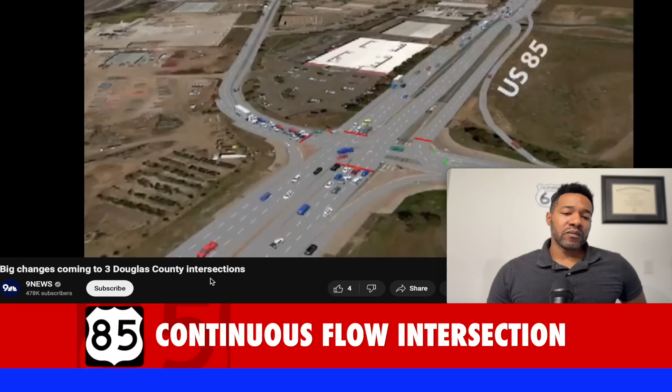Drivers are literally going to be scratching their heads thinking, what is going on along Highway 85? So what's going to be happening here? It's called a continuous flow intersection, better known as CFI. So I want you guys to take a look at your screen, especially if you're in Douglas County and take Highway 85. So here's an example of what you're going to experience in this area. This new flow removes the conflict between oncoming traffic and drivers turning left.

So yep, just like she said, this is yet another take on that, removing that conflict between left turning traffic and through traffic through these intersections.

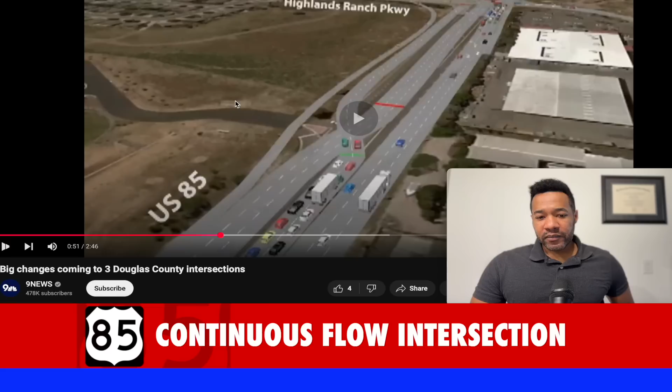Drivers turning left at the new intersection will cross through traffic using a new signal. So you're going to continue to that far left side of the road and then make a left turn, while the other drivers, they're going to just keep driving as they normally would at any typical intersection. So these intersections along Highway 85, they're going to be opening up in phases. Starting on Wednesday, phase 1 will open up southbound Highway 85 to eastbound Highlands Ranch Parkway traffic. Then March 26th, that's going to be phase 2 that is scheduled to open for southbound Highway 85 to eastbound Town Center Drive, and then you have C470 that it's going to open up sometime in April. And this full project includes several other elements that's going to be completed later this year. We have a very good track.

All right, so this area in question, we can go over here to our Google map, go take a look at the Colorado area. It's here south of Denver. So if you look at it, you see Interstate 25 is the primary north-south interstate. The road in question here is US 85, which is the surface road alternative to Interstate 25. So you see Highlands Ranch down here. Basically, this is all suburbia out here.

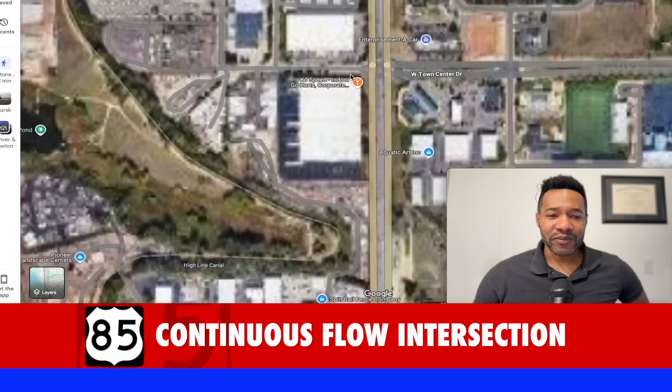So they're talking about this area in here, putting these intersections. And if you look at the satellite view, you can see right now it's just a 4-lane divided intersection, probably lots and lots of traffic out here. But yep, this is our corridor right here, US 85. Let's go back to the video.

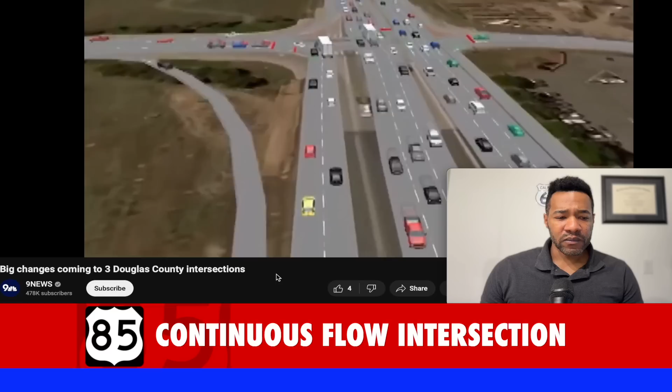Record safety wise, they actually perform better, 10 to 15% better in terms of reducing crashes. So it actually functions quite well. And that results in a much more efficient and safe and cost-effective solution for intersection problems. So Corey, Jordan, this is all part of that widening project along Highway 85 here in Douglas County. This project actually started back in 2022. It's not going to be completed until later this year.

Okay, so let's take a little more in-depth look at this continuous flow. I'm going to give you guys my thoughts on that intersection. I keep saying interchange.

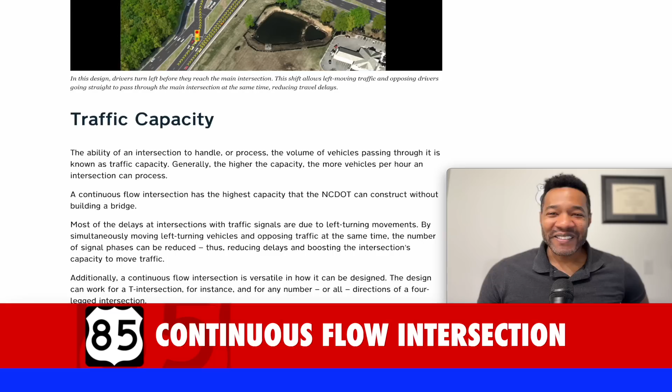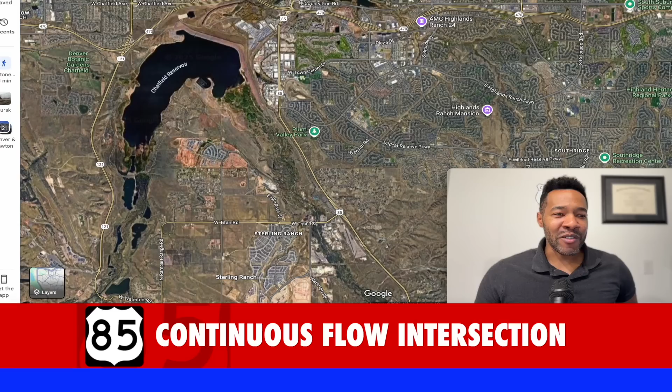Okay. So we're here on the NCDOT website. So they built one of these in Charlotte when I used to live out there, over on Mount Holly Huntersville Road and North Carolina 16. So I'll show you what that looks like here on the map because it already exists out in Charlotte.

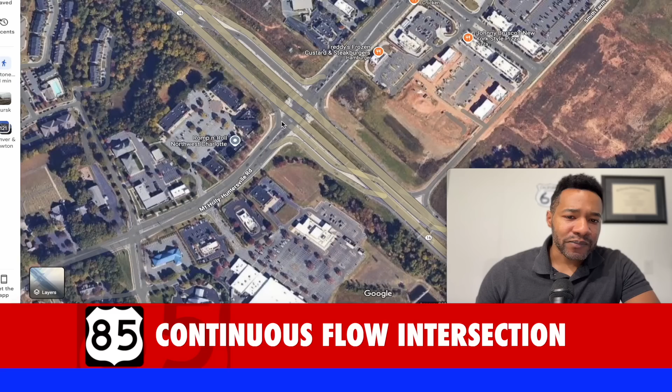Where is it? Oh, right here. Here we go. There it is. There's the one right there in Charlotte. So I want to zoom in here a bit. All right. So for most drivers, a continuous flow intersection isn't going to change anything for you and how you move. It's only going to change things for the left turning traffic on the main road.

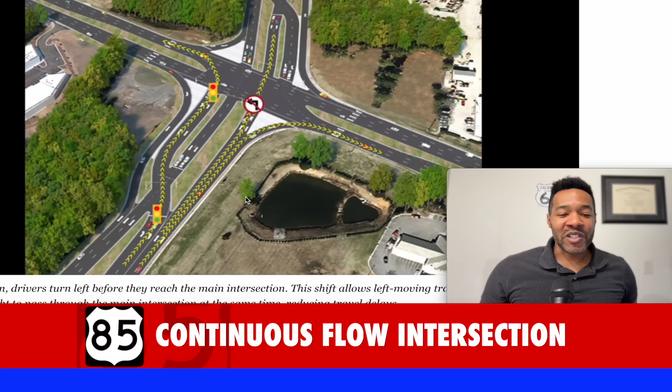So you see this here is the main road, the one going straight up and down here. And this is the minor road. The main road is the one that has the continuous flow movement. And what's changing is basically left turning traffic is going to go into a separate little mini alignment in here. And it's going to be on the left side of the oncoming lanes of traffic.

So this is the part where drivers get confused because we drive on the right side of the road here in America. So any movement that puts people on that left side of the road is going to have some sort of driver confusion. You see this a little bit with the divergent diamond interchanges when people who aren't used to those drive over one for the first time.

So what these are mostly used for are high capacity major arterials. It's similar to the uses of the Michigan left and the New Jersey Jughandle. They're going to be used for high capacity major arterial roadways. You want as much through traffic to get through as quickly as possible and as safely as possible. So these are built in places where, you guessed it, there's usually a long queue for left turning traffic.

So if you go straight through the intersection, nothing's going to change for you. You can't turn left, of course, at the traffic light at the center of the intersection. If you're turning right, not much is going to change for you either, but you do have your own separate lane for right turns. And what changes is when you cross the intersection on the major road, there's a new signal right here that's further away from the main intersection. And there's going to be the same thing on the opposite side up here.

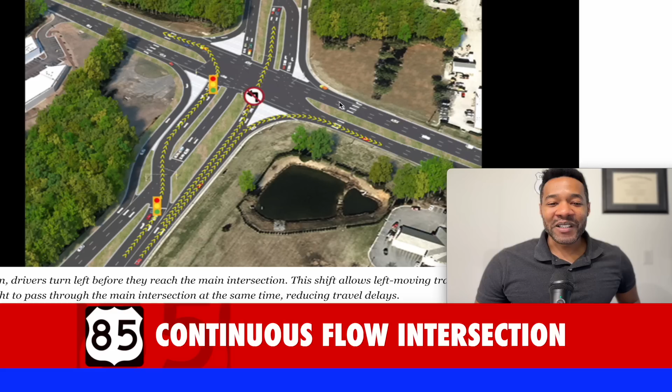Now, if you're on the minor road, nothing really changes for people on the minor road, other than you have the separate right turn right here, outside of the intersection. Same thing on this side. But outside of that, everything on the minor road is going to stay the same. Even your left turn movement on the minor road is still going to be signalized, and you turn into here, and you're going to queue in here.

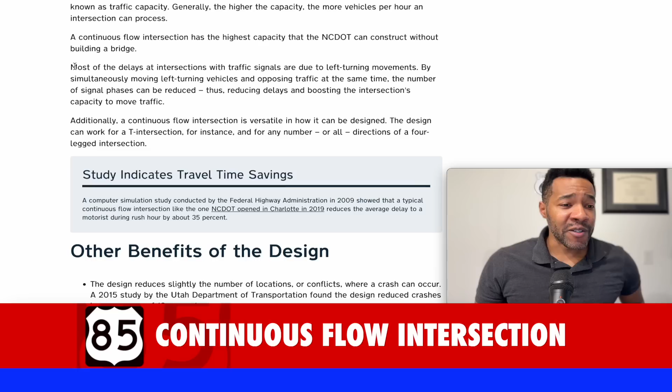So I might have to do a full video breaking down this intersection, so we might get into that a little more later on. And NCDOT also says it here. Most of the delays in intersections with traffic signals are due to the left turning movement. So the idea is just to get as much through traffic through as possible.

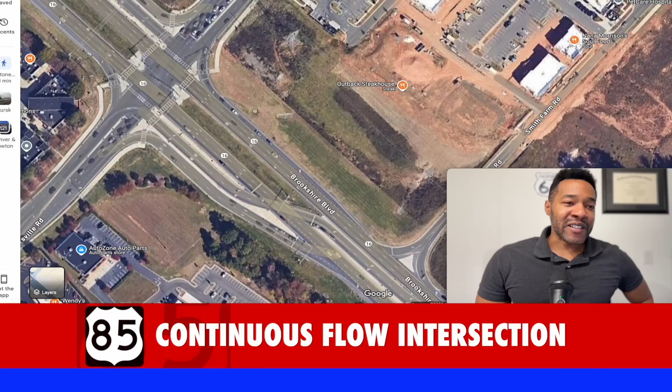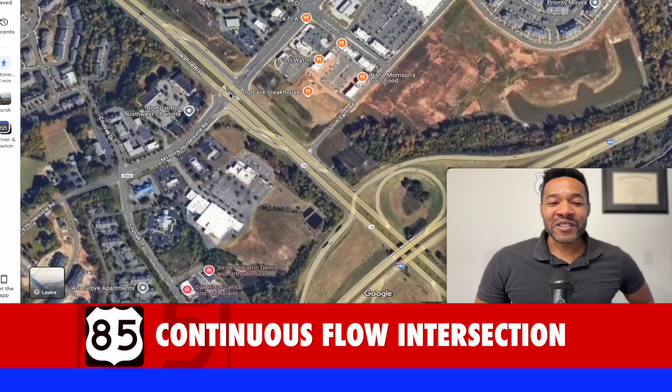So if we go back and look at where they built this in North Carolina, for those familiar, Charlotte doesn't have an east-west freeway, not a true one, but the closest thing to it is this piecemeal of Independence Boulevard and Brookshire Boulevard. So the goal up here was this used to be a major bottleneck in Charlotte, right here, the 485 loop, and then you had this big signalized intersection right next to it. So they built this continuous flow intersection to keep traffic flowing all the way through east-west across Charlotte.

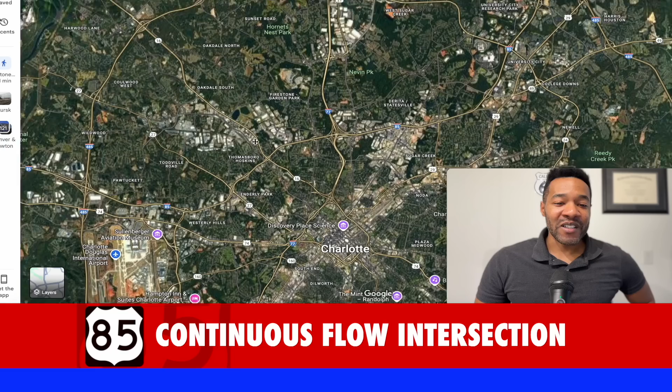So 16 will never be a freeway, but you want traffic to move as quickly as possible and as efficiently as possible east to west across this roadway. And same thing if you go back and look at Colorado. You see south of Denver.

If we look south of Denver, you notice that there aren't that many roadways. You have Interstate 25 that obviously goes all the way across the state, high capacity interstate. And you have US 85. And you don't really have much else going north-south in this area, even though most of Colorado's population lives in the north-south corridor between Colorado Springs and Fort Collins.

So obviously US 85 is not going to be a freeway, but this keeps it being able to move a large capacity of vehicles very quickly, just a step under a freeway. So continuous flow intersection, guys, there it is. Coming soon to Douglas County, Colorado. So my suburbanites out there, get ready. I know there's going to be a lot of driver confusion.

All right, now for this next story. If you guys have noticed over time from the videos that I've done on this channel, most new roadway construction, especially in regard to interstates, is taking place in the Sun Belt, obviously because that's where most Americans are moving to. And the Sun Belt didn't have as much population, or at least a large percentage of America's population, back when the interstates were first proposed. So you see most of our new interstates are taking place there.

You got I-69, you've got Interstate 11 out west between Phoenix and Las Vegas that we've talked about. And most other extensions and expansions of interstates and highways are coming in the south or in the southwest. But we have a surprising place where you would not have expected a new interstate to be underway. And that is none other than New York. That's right, guys. New York is working on a new interstate highway. Let's take a look.

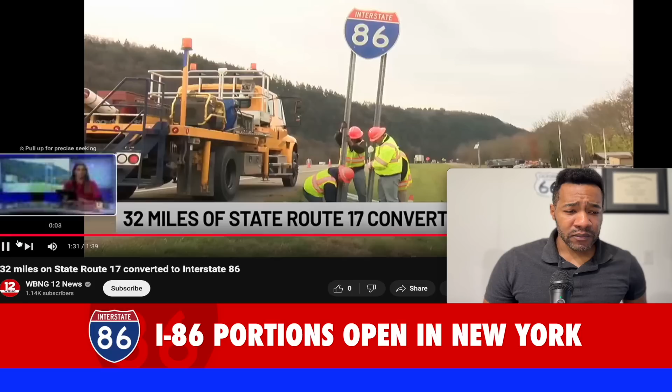So that was 32 miles of Route 17 that was converted to interstate. Officials say this signifies a major step forward in the ultimate goal of expanding I-86 throughout New York State. It was great to get the future 86 designation signage up years ago, but to have that taken down and have the permanent full-blown Interstate 86 signs up is just another step. State officials say this designation will improve economic development for distribution centers, manufacturers, and other business opportunities along the interstate.

All right, so there it is, Interstate 86. So my folks in New York, what do you think about this new interstate? Do you think it's going to help? I know New York has been struggling in recent decades as far as population loss, as have many parts of the Rust Belt. So maybe this interstate coming can bring some businesses back up in this area. Things have been tough.

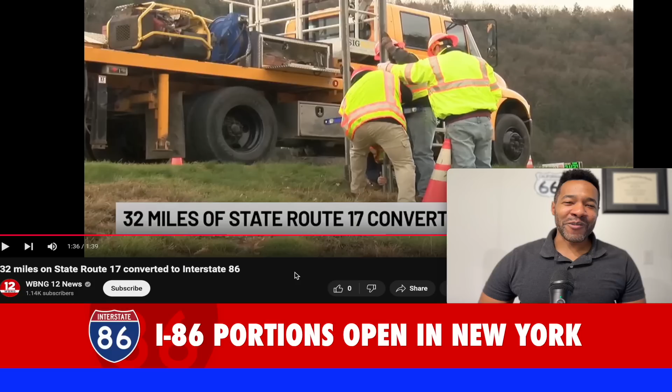And last but not least for today, we're going over to my former neighbor to the south, South Carolina. And this time it's actually good news for South Carolina roadways. They're actually doing some work. South Carolina's getting it done. Let me show you how.

The interchange of I-26 and I-95 will be getting a makeover. A big one. Hannah Powers tells us Governor McMaster was at a groundbreaking ceremony earlier today. Hannah. Brendan, Carolyn, the groundbreaking ceremony for the interchange improvement project taking place this afternoon, and Governor Henry McMaster was joined by South Carolina Department of Transportation leaders to celebrate these new plans. The ceremony started at 3 o'clock this afternoon at the Wetzel Pond Road Overpass in Bowman.

SCDOT officials explaining that the agency will reconstruct the existing interchange ramps along with the acceleration and deceleration lane tie-ins. And construction plans also include a replacement of the Wetzel Pond Road Bridge over 26. The upgrades should help alleviate some travel delays and overall enhance transportation.

All right, Hannah Powers, let me show you guys what we're dealing with here. South Carolina finally making some progress on Interstate 95. I guess it's better than nothing. So for those who aren't aware, South Carolina currently has the worst section of Interstate 95 in the country, which I broke down on my Interstate 95 video. And this is part of the problem.

As you can see right here, this is the interchange in question, and it is a very outdated 1960s, 1970s cloverleaf interchange, which was just fine and dandy back in the 1970s when there was like 2-3 million less people in South Carolina, but it does not fit the bill today. Looking at this, I would have thought I was in Minneapolis. Look at these 1960s ramps.

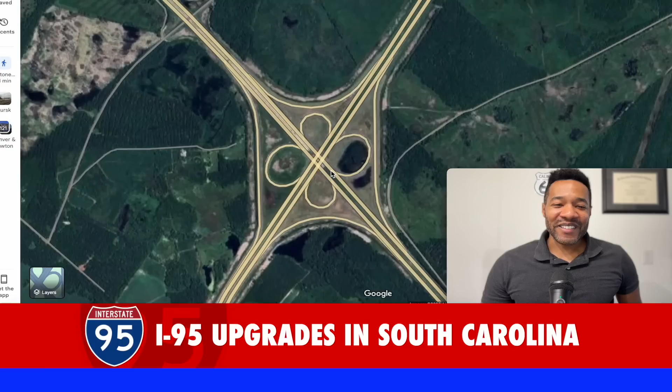So pretty much if you're familiar with this area, this is where a lot of the gridlock starts, because I-26 is the main corridor in South Carolina. I remember when I used to live in Charlotte, if you're going to Florida, you would come down 77 and get on 26, and there was constant gridlock all the way down 95 from this interchange. It's woefully inadequate for the amount of traffic that it serves now. So basically South Carolina hasn't done anything, at least up until this point, with I-95 since it was originally built.

So this new interchange that you saw in the video, let's go back to that. They are eliminating the cloverleaf with their low capacity, and they're not showing the full scope of it, but this is 95 right here in the middle. Traffic getting on westbound I-26 will have a separate ramp that goes over here, a flyover, and the same thing on the opposite side over here. This will be sufficient out here because very few people go from I-26 eastbound to I-95 northbound, and the same thing from I-26 westbound to I-95 southbound.

One of the interesting parts though, that I don't think they're going to mention in this video, is you see the bridge over I-26 right here. Notice that it is a little wider. Now I can't tell from the rendering, but it looks like it's wide enough to accommodate at least a third lane. So I got to give South Carolina some credit for their forward thinking. That tells you they don't have the money to do it yet, but they are making the space to do it. And they eventually do want I-95 to be 3 lanes on each side through South Carolina.

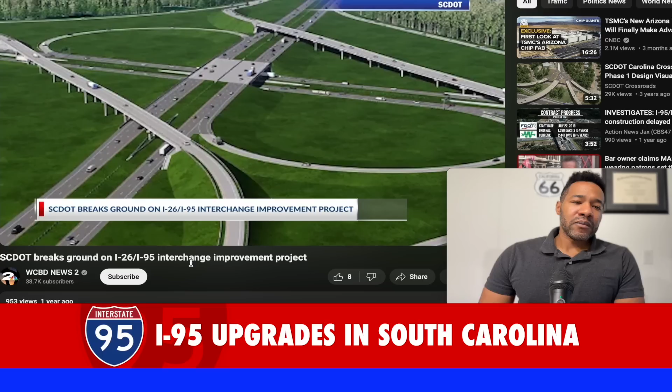Efficiency. Officials say they're excited to get started on these improvements that will make navigating two of our major South Carolina interstates safer and more user-friendly. Governor Henry McMaster happy to offer his support today and help better connect our state to the rest of the country. This is the sound of prosperity. What we hear right now, I'm so happy to hear these vehicles coming up and down the road.

Well, I guess someone should have taught the governor that you don't hold the microphone right up to your mouth, sir. Oh, we can't even understand what he's saying. Let's see if we can skip past that. No.

All right. But that intersection right there, I-95 north and south and I-26 east and west, what we're doing today is going to allow this area to blossom and come forth. It's going to help all of our people for generation after generation. Now, the total cost of the project estimated at $240 million.

$240 million. No wonder it took South Carolina so long to get this done. But hey, they're making progress. And the governor sounds like a true South Carolinian with that accent. Shout out to South Carolina, making some moves.

And all right, ladies and gentlemen, that will do it for today. We got a new interstate in New York. We've got continuous flow intersections about to pop up here in Colorado. And we've got South Carolina of all states. Can you believe it? South Carolina upgrading Interstate 95? Man, I never thought I'd see the day.